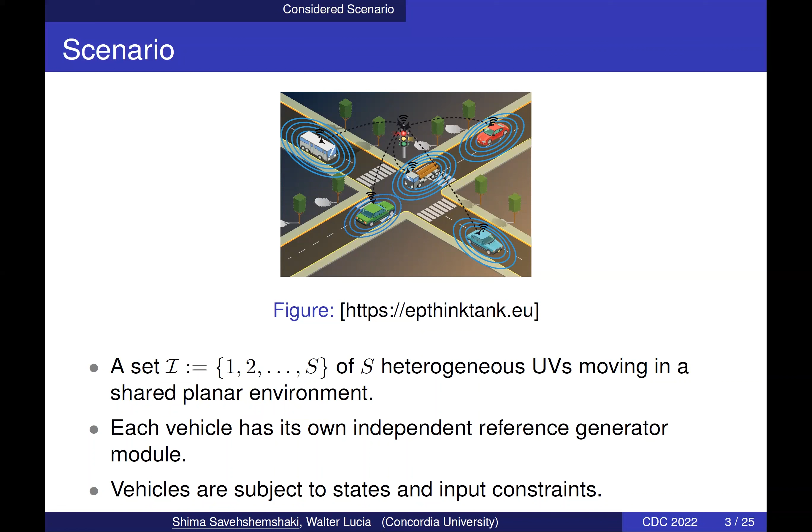The scenario of this work is that we are considering a set of S heterogeneous UVs moving in a shared planar environment, and each UV is equipped with its own reference generator that provides its reference trajectory. Between vehicles' trajectories, there are possibilities of collisions. There is no intercommunication between vehicles, but vehicles share information with a common centralized unit named Traffic Manager, or TM. There are physical limitations, pose constraints on vehicles' states and inputs.

The UV model that we are considering here is described by the constrained discrete double integrator model as follows, where X is the state space vector in which P shows the vehicle's position and V shows the vehicle velocity, and the system is subject to a bounded disturbance D and the following state and input constraints. All these sets are compact sets, including 0.

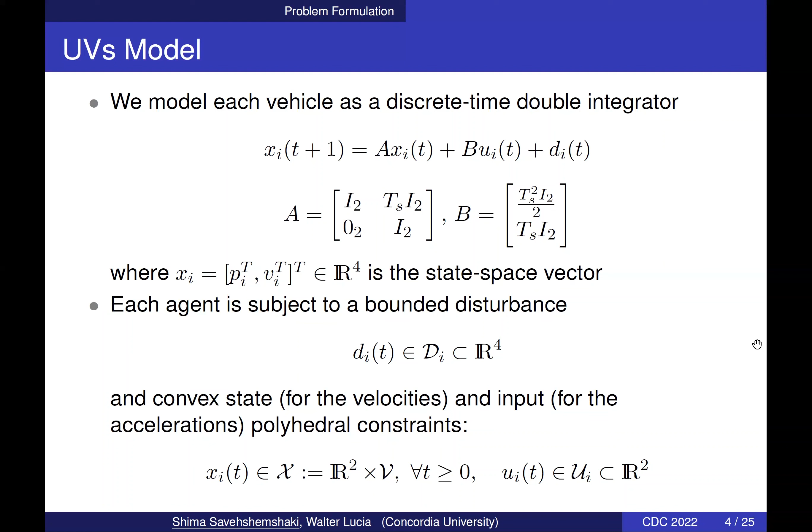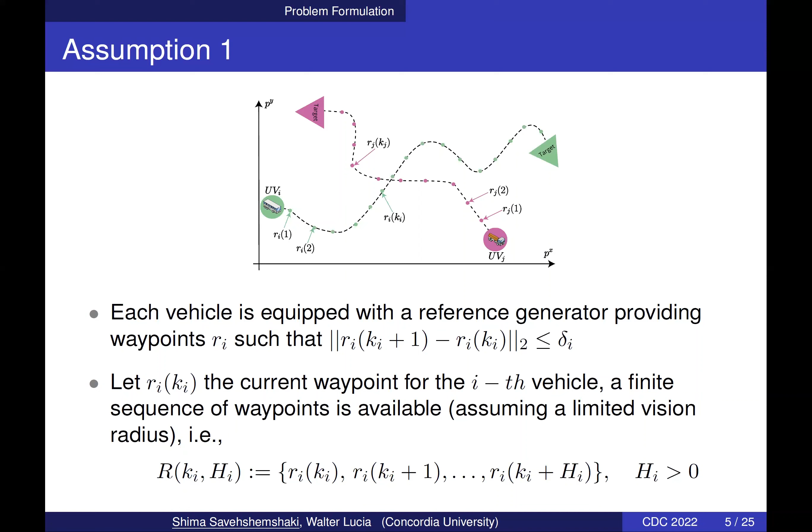To have a better perspective of our problem, we must consider some assumptions. The reference generator provides the reference trajectory as a sequence of NP waypoints, and the maximum distance between two consecutive waypoints is bounded by delta. We also assume that a limited vision radius, as a finite sequence of waypoints, namely the waypoint prediction horizon, is available.

The control problem we are facing here is that, regardless of disturbance realization and input and state constraints, UVs are required to, as a first objective, sequentially track the given waypoints under different velocity constraints, and as a second objective, avoid collision with a minimum number of stop occurrences while following the reference.

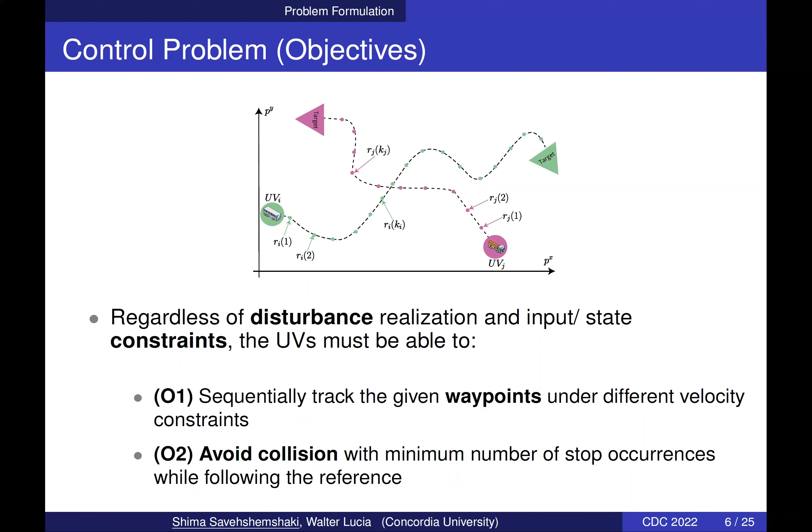We have proposed a novel control architecture that consists of a set of S local tracking controllers based on the dual mode set theoretic model predictive controller, or MPC, to satisfy objective 1, and a centralized traffic manager that predicts collisions within the prediction horizon and imposes time-varying velocity constraints or stop conditions on the vehicle to ensure absence of collision and minimize the number of stops. This traffic manager fulfills objective 2.

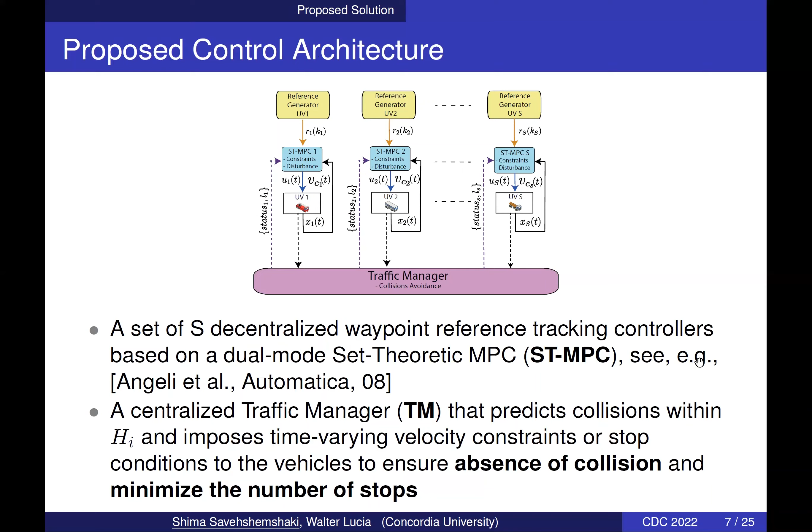To address the first objective, the set theoretic MPC tracking controller operations are used here. To see how single waypoint tracking is done, let's look at the offline and online operations. Offline, we need to build an RCI region and design the associated stabilizing controller for this RCI region, and also build a family of N robust one-step controllable sets until the desired state space region is covered.

Once we have the families of one-step controllable sets computed offline, in the online phase, first we need to find the minimum set index membership that the initial condition, or let's say the current states, belongs to. Once we have the position of the current state, we have one controller to move the state to the terminal region and another controller to keep the states within the terminal region.

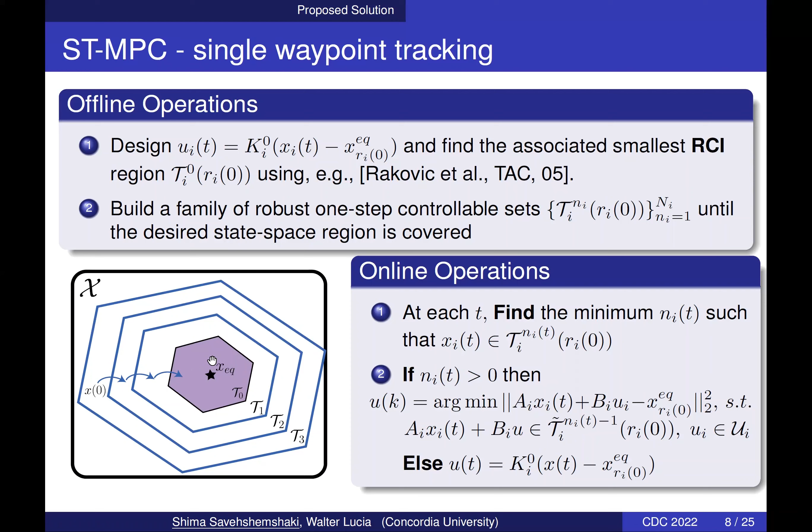Now we need to know how waypoint switching and tracking a sequence of waypoints is done using the set theoretic MPC. For the considered UV model, an equilibrium pair is as shown, and no state constraint on the vehicle positions is prescribed. Then the family of one-step controllable sets centered at the equilibrium state can be shifted to any other equilibrium, which in our case is the next waypoint, and then the set theoretic MPC can be applied as explained in the previous slide.

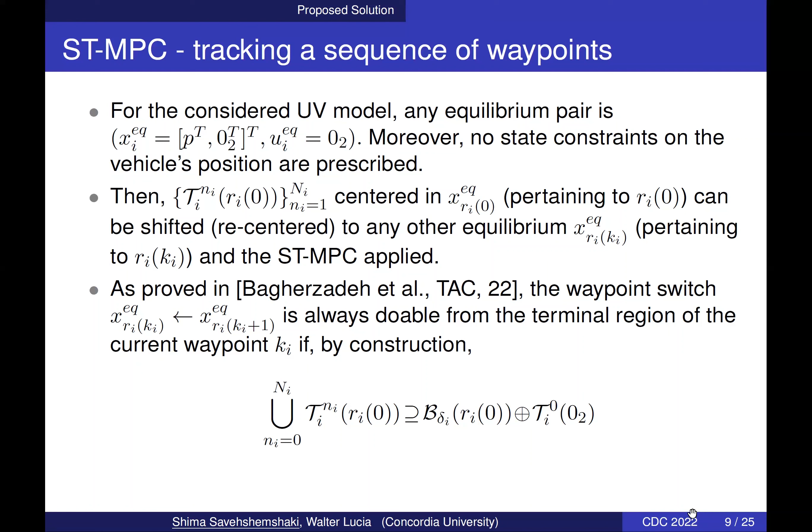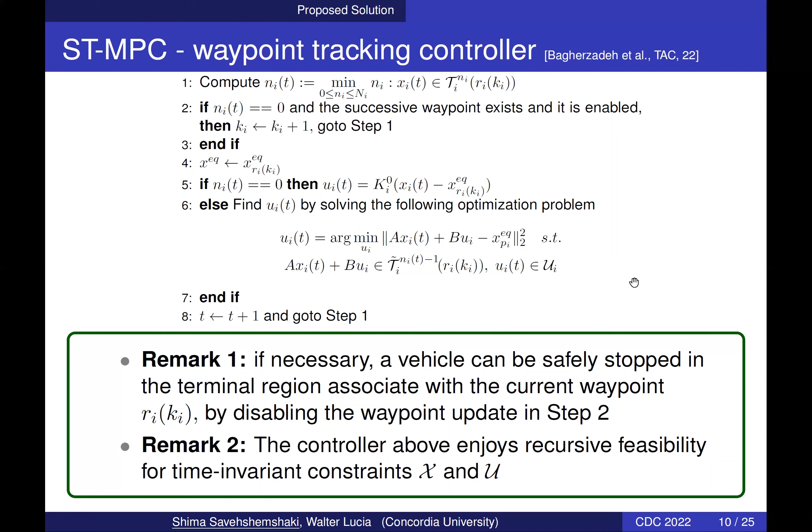Now we need to see how the set theoretic MPC is feasible under TM operations. Let's revise the TM desired operations, which are predicting collision and defining max velocity for each vehicle, or stopping vehicles whenever strictly necessary. For these aims, we need to make the following assumption.

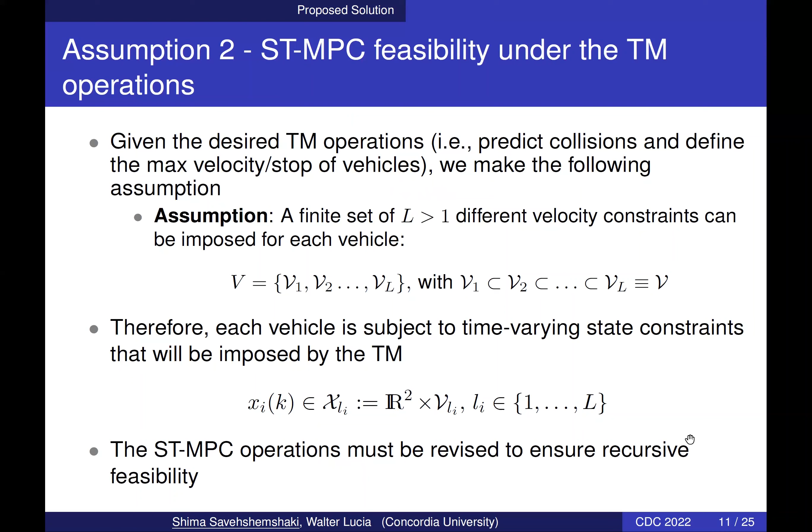A finite set of L admissible velocity constraints are imposed for each vehicle, which is this V satisfying this condition. Therefore, the state constraint X_LI is used to denote time-varying state constraint. So the set theoretic MPC must be revised to ensure recursive feasibility.

Now to see how the set theoretic MPC works with the time-varying velocity constraints, we need to revise the offline and online operation. Therefore, in the offline phase, the RCI region must be built using the worst-case velocity constraint scenario, which is minimum velocity constraint.

And then, for each velocity constraint, a family of one-step controllable sets must be computed and built from the same RCI region. In the online phase, the constraints switch, which means the state constraints of velocity level 1 switch to the state constraints of velocity level 2, which are enabled.

And this happens when the current state enters the domain of attraction of the controller using these state constraints, which is for velocity level 2.

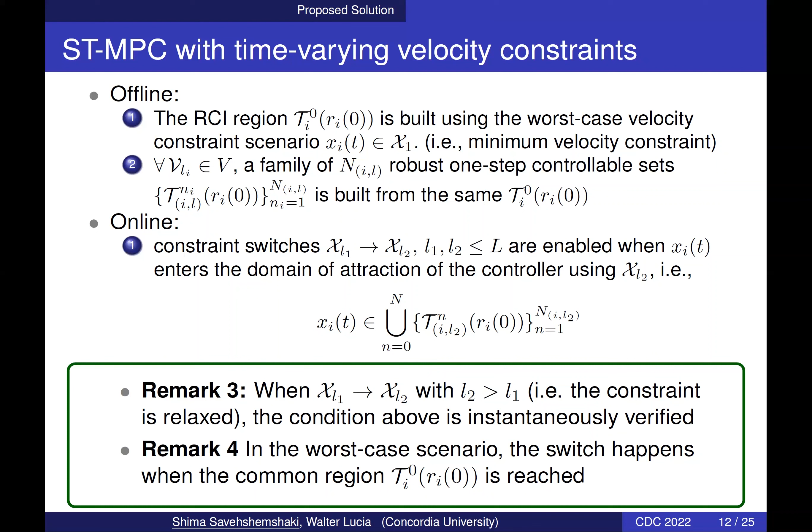There are two important remarks about this procedure. First, when the constraint is relaxed, switched from 1 to 2, the condition above is instantaneously verified. Second, in the worst case scenario, the switch happens when the common RCI region is reached.

Before designing the traffic manager, we need to know the data exchange between the traffic manager and UVs. Offline, each UV sends the family of one-step controllable sets computed for each velocity level and the associated controller domain to the traffic manager. Online, each UV sends the predicted waypoints and the current set membership index to the traffic manager.

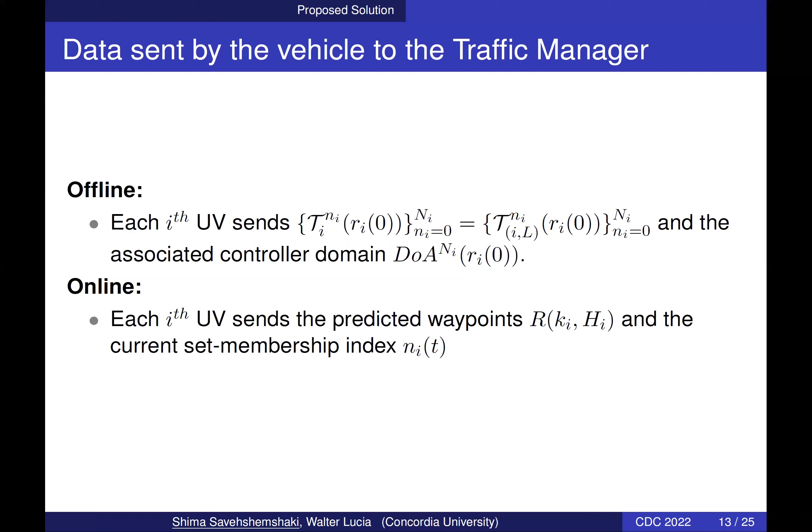Based on the data exchange and collision avoidance objective, TM operations are twofold. First, it should impose the vehicle's velocity constraints to minimize the possibility of a collision between the vehicles. Second, it should ensure the absence of collision by stopping, whenever strictly necessary, the minimal subset of vehicles.

We can model the TM as a function like this one, in which we are getting the waypoint prediction horizon, this R, and each vehicle's set index membership as an input of this function. Then TM provides this for each vehicle that can be either stop or go.

And if the status is go, TM assigns the velocity levels, this Li, to each of the vehicles whose status is go. As mentioned in remark 5 here, given the set theoretic MPC operations, TM can safely stop a vehicle only in the terminal region of the current waypoint.

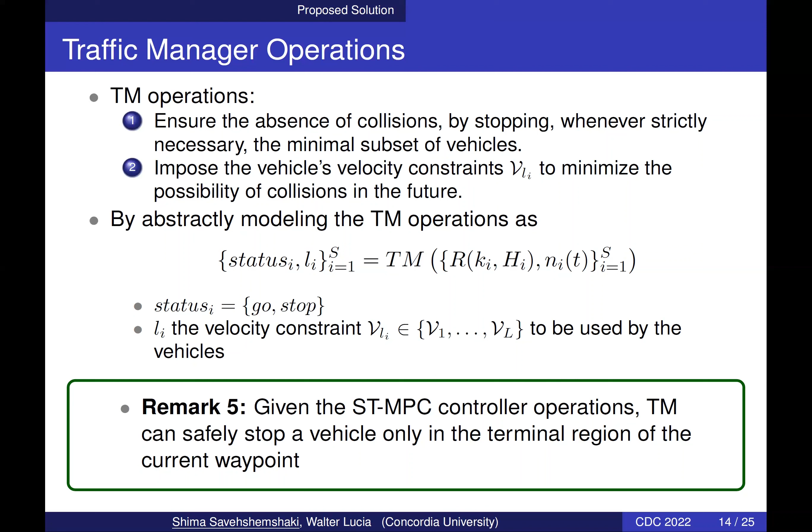So, to determine the outputs, 3 steps must be taken by the traffic manager. In the first step, TM must build and update the collision graph. At t equals 0, or in the offline phase, TM computes an undirected collision graph.

Let's take a look at this figure, in which we are showing an example of 8 vehicles. We show the vehicles by nodes and the possibilities of collisions by edges. The collision graph characterizes the vehicles based on their collision in the waypoint prediction horizon, which we show with the red nodes and solid purple lines.

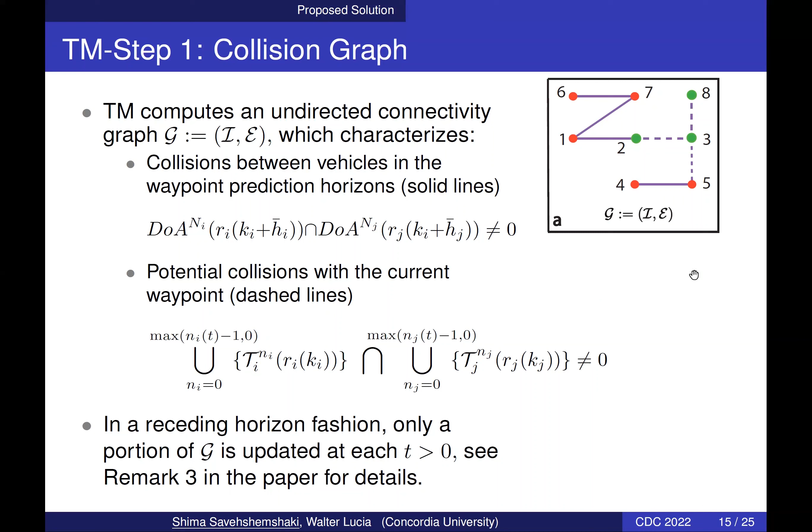And the vehicles that have the possibility of collision with a current waypoint are shown with the green nodes and dashed purple lines. At t greater than 0, or online, in a receding horizon fashion, only a portion of this graph must be updated.

In the second step, TM needs to decide which vehicle it needs to stop. As stated in remark 6, only vehicles that just updated the desired waypoint can be stopped. In other words, vehicles which are in the terminal region of their current waypoint can be stopped. With this information, let's take a look at this figure, in which we have a portion of the previous graph.

In this graph, vehicles 2, 3, and 8 are in the terminal region of their current waypoint and want to switch to the next waypoint, while vehicle 5 is far from its current waypoint and hasn't reached it yet, so we cannot stop vehicle 5.

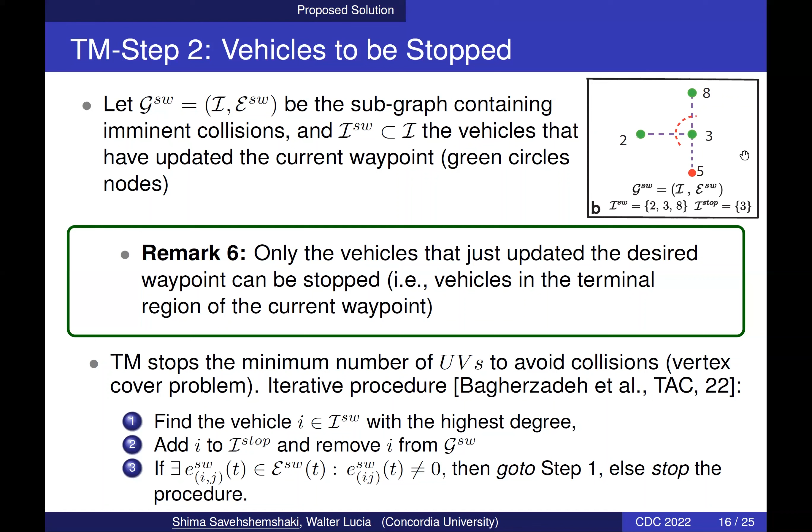Among these 3 vehicles that want to switch to the next waypoint and have a possibility of collision, the traffic manager must stop the minimum number of vehicles to get this whole graph completely disconnected. So it stops vehicle number 3.

In the third and last step, the traffic manager wants to minimize future collisions. It considers all vehicles that were not stopped in the previous step and groups them based on their possibility of collision. It tries to speed up and slow down the vehicles in each group to avoid reaching the collision point at the same time. To do so, in each group, it finds the distances to the next possible collision point.

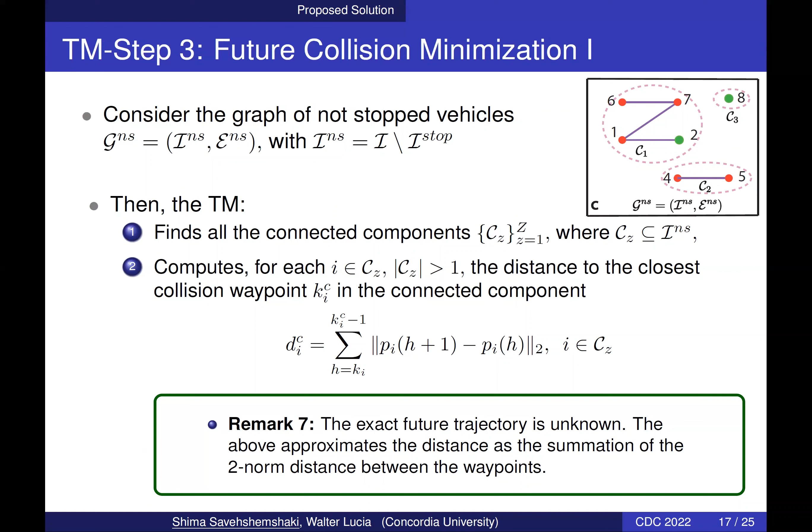As mentioned in remark 7, the exact future trajectory is unknown, and this equation approximates the distance as the summation of the 2-norm distance between the waypoints. Therefore, for each group, it collects the computed distances in an ordered vector, and proportional to those distances, it assigns velocity levels to each vehicle.

These velocity levels are assigned according to a heuristic solution that aims to differentiate the velocity level as much as possible. As mentioned in remark 8, to allow the closest vehicle to overcome the collision point before the other vehicle could reach the same collision area, we use this heuristic solution.

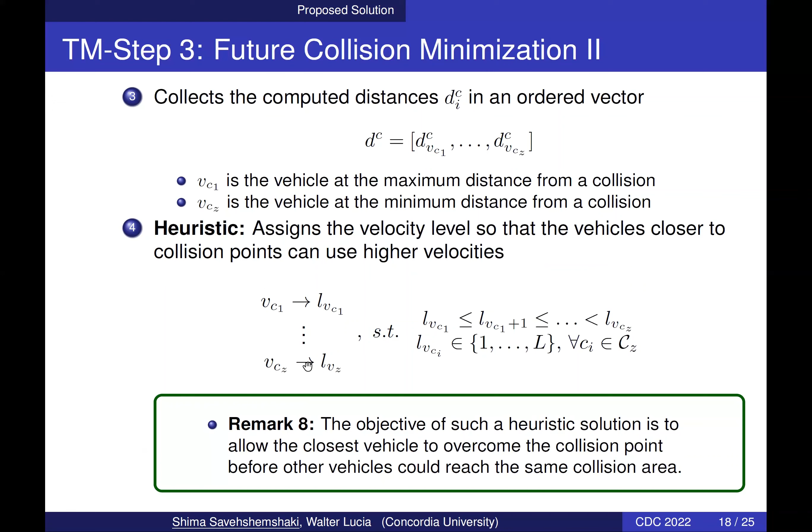To illustrate the effectiveness of our proposed solution, we simulate an example. The general setup is shown here: 2 vehicles are considered, described by double integrator models, subject to different input constraints and disturbances. A family of n robust controllable sets computed for each velocity level has been computed for each vehicle, and 3 admissible velocity levels are considered.

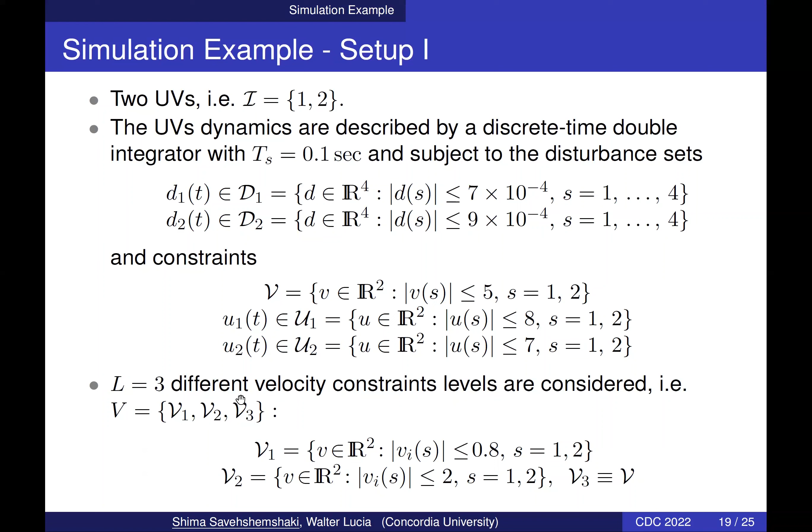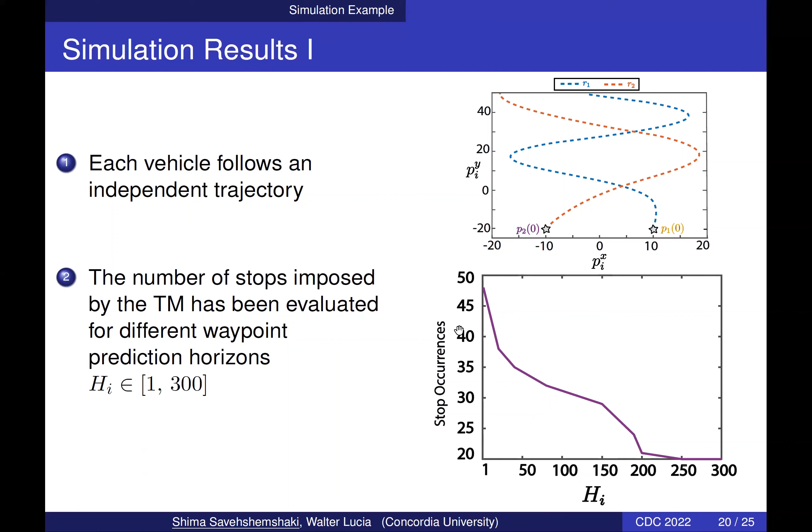In this figure, we show the trajectories that each UV is tracking. Here, the number of stops imposed by the traffic manager has been evaluated for different waypoint prediction horizons between 1 and 300. We run the simulation for different prediction horizons because when the prediction horizon gets bigger, the traffic manager has information about more future collisions, so it can prevent collisions before the vehicles reach the collision points, and we expect stop occurrences to decrease. As you can see, as the waypoint prediction horizon increases, stop occurrences decrease.

For the two previously mentioned vehicles, let's consider a prediction horizon of 15. If we refer to the middle of the figure in this zoom-in, at t equals 85.5 seconds, this shows the situation when both vehicles are in the terminal region of their current waypoint and want to switch to the following waypoints.

But because there is a possibility of collision, as you can see here, there is a set intersection which we show with this orange area. Therefore, the traffic manager stops vehicle 1 and lets vehicle 2 pass.

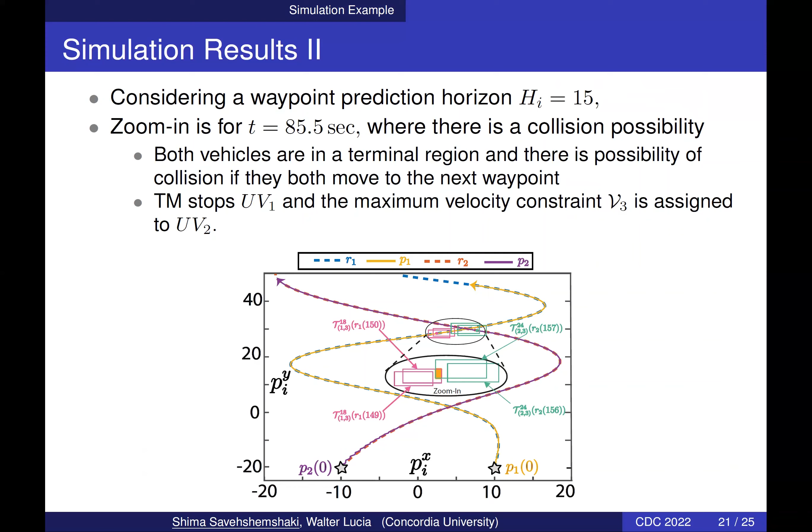Let's look at these figures showing the different velocity levels and stop commands assigned to each vehicle. For example, for UV2, when the waypoint prediction horizon is 1, the traffic manager stops the vehicle 10 times, but when the prediction horizon increases to 250, vehicle 2 has never been stopped. On the other hand, for UV1, when the prediction horizon is 1, the period of stop is greater than when the prediction horizon is 250.

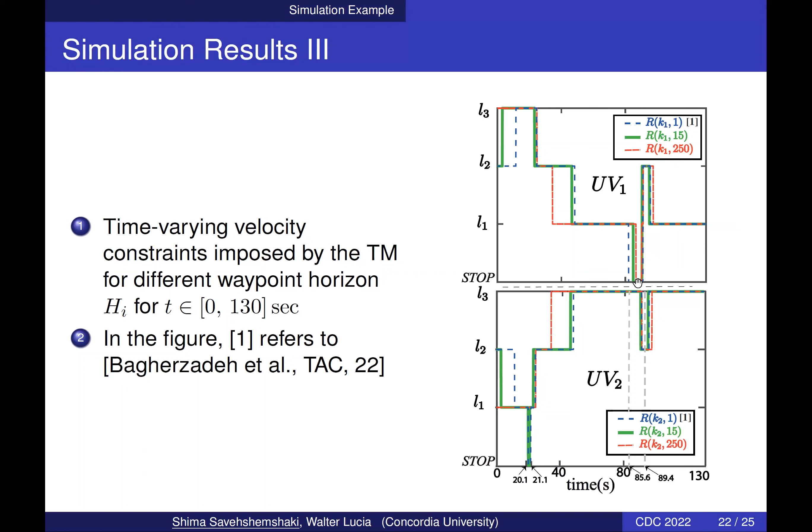In conclusion, this work extends the collision avoidance strategy developed in our previous paper. Compared to that paper, the presented solution is capable of exploiting a prediction horizon on the waypoints to minimize the number of vehicles stopped required to avoid collisions.

As future work, we can extend the proposed solution to work with more complete, nonlinear models of UVs, such as differential drive robots or car-like vehicles. We can also enhance the traffic manager operations by taking into account more sophisticated collision risk measures, such as time to collision and priorities among vehicles.